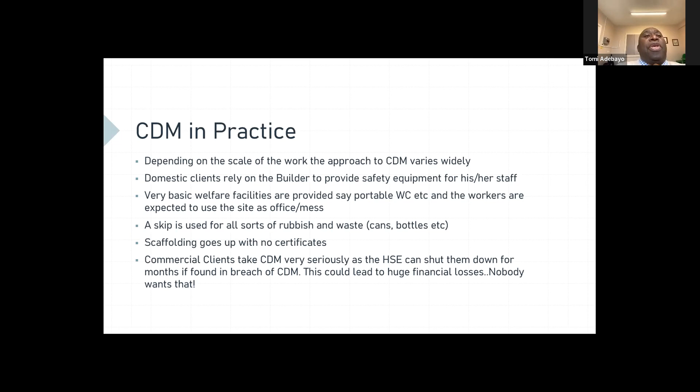Let's move to the next slide.

Now, in a typical domestic residential project, the ones that are very common are loft conversions, side extensions, basements, garage conversions. A loft conversion is very common because a 3-bedroom house can easily be converted to a 5-bedroom house with probably a fraction of the cost of the price of the house. So you could have a 3-bedroom suddenly become 5-bedroom by just spending between 35 and 50,000 on the house, depending on how big it is. Now, what we have as professionals, the challenges we face when working in this environment...

is that you're dealing with somebody that is a layperson, not to say that they are not educated, but they do not know much about construction, apart from things they've been reading on Grand Designs, Pinterest. They've seen all sorts of fancy things, and these things they want to implement in their house. And sometimes because they are paying, they believe you should listen to them and do what they want. So it does take a bit of confidence, maturity, and experience in order to let people control what they want to do.

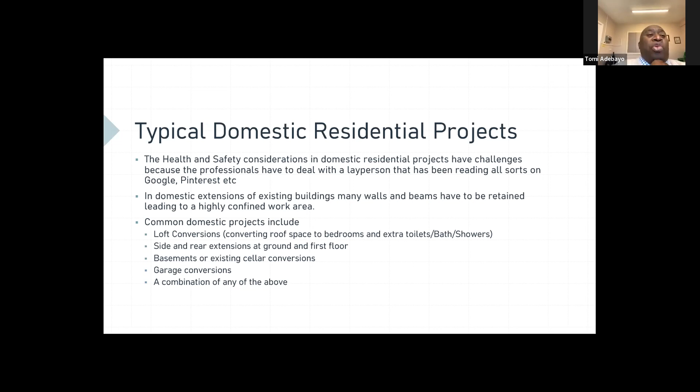So it does. Now, domestic client professionals. Because the domestic client is also a layperson, they do not always know who is qualified and who is not. A layperson will not necessarily know that an architect could be a chartered architect, or that a surveyor might not be an architect at all. They don't know that an engineer might be a chartered structural engineer - maybe he's actually a mechanical engineer. A lot of the time, they do not know these things.

So sometimes, inadvertently, they do employ people that are not very qualified. Another problem they do have is with the fees, in that they are trying to minimize their costs, and they end up employing people that are not very qualified.

Now, we have all sorts of demands by clients. In the UK, they really love these, what we call bifolding doors. They are doors that can open completely at the back of the house. Typically, they shouldn't be more than 4 meters wide for a reasonable person, but you'll have some people that say they want it, they will extend the house to the side and want to open it all completely. And the longest one, the widest one I've had has gone up to 13 meters.

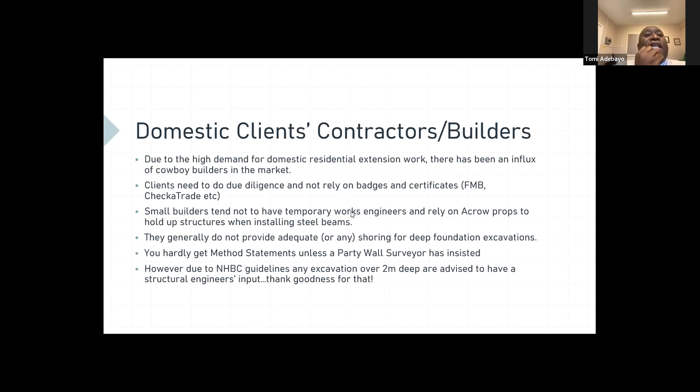On the commercial side, you find that these things don't happen. The typical commercial clients you would have are developers building blocks of flats, housing associations, and there is a huge demand for university accommodation. So there are lots of companies now coming into the market that deal solely with university accommodation, and some that deal solely with old people's homes and things like that.

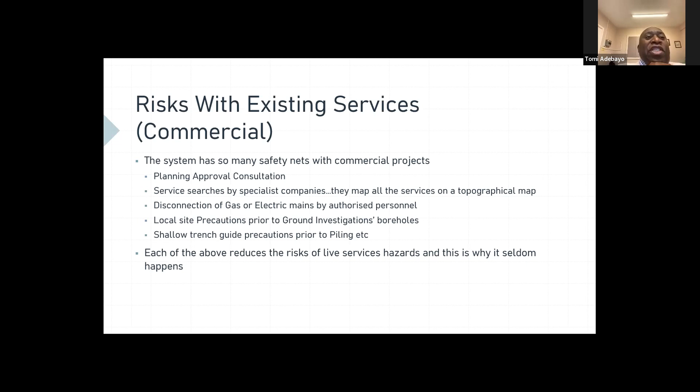Asbestos is something that leads to a very long-term fatal disease, asbestosis, and there are still properties that have asbestos in them. It's not very common in domestic, but there are some old garages that have asbestos roofing sheets, and sometimes unscrupulous builders will remove them and just dump them in the garden. They are supposed to be removed carefully. The builder can remove them, but he can't dispose of them, they have to be disposed of by a licensed handler.

All these things are very cheap to do properly, yet we still find people cutting corners doing this.

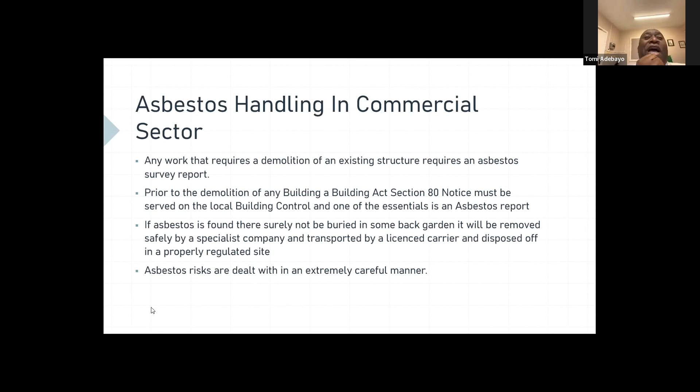In the commercial sector, you cannot demolish a house, property or building without an asbestos survey. You also need to notify building control at the local council under a Section 80 notice, and one of the prerequisites is an asbestos survey. They don't want to know whether you think asbestos is there or not - you have to carry out this survey. It has to be carried out by a regulated consultant, and that report has to be submitted to the council. If asbestos is identified, it will be removed by specialists, disposed of and handled by a licensed carrier, so you don't have problems like that.

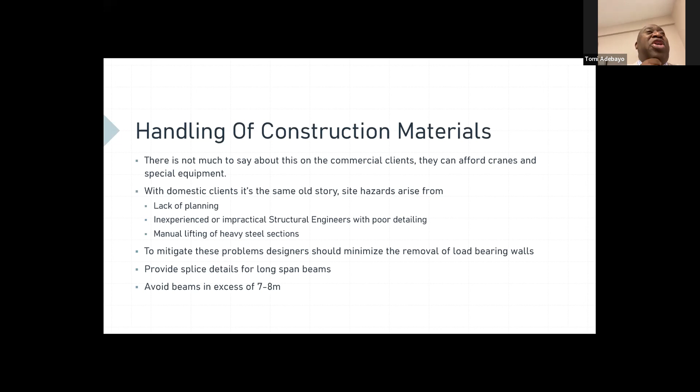Now, you do have very heavy steel sections, timber sections, concrete, and various building materials used to put a project together. These things require handling, and they have to be handled in such a way to reduce the risk to people carrying heavy equipment. Domestic clients sometimes have engineers that don't take into consideration all of the constraints in an existing house where walls are there that cannot be demolished. So sometimes we actually suggest to designers to reduce the removal of load-bearing walls, provide splice details for long beams, and avoid steel beams in excess of 7 to 8 meters - they are difficult to transport.

Now, just to look at a few scenarios where things have gone wrong - I wanted to do this before getting towards the end of my presentation, as I might have gone very quickly.

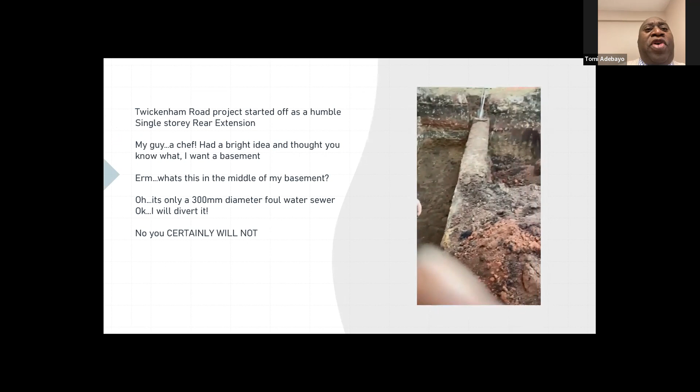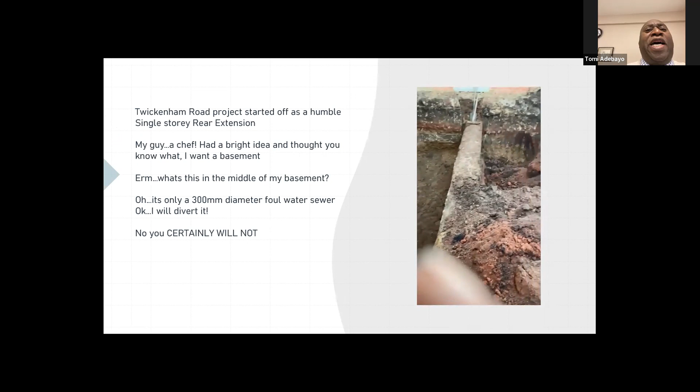So let's look at a project on Twickenham Road. Can you just play this video for us, please? Now, if you look at this guy, you can see that is supposed to be an extension. That thing running across his site is a main 300 millimeter diameter sewer. If you freeze it just there, you can see it running across the back of the property.

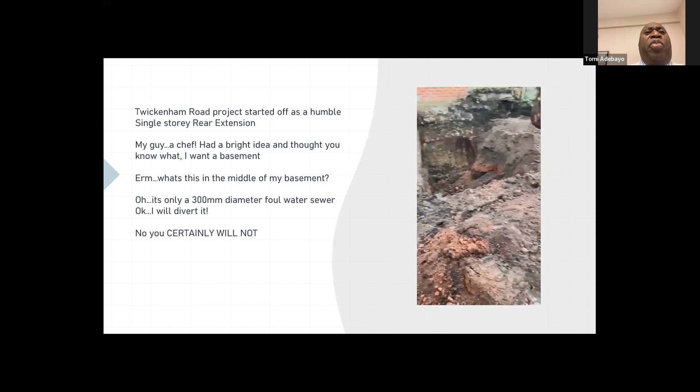This gentleman started this job and said, oh, I want to do a single-story extension at the back of my house - that's not a problem. Because he didn't do enough background checks, he started digging. Then suddenly he said, you know what, I want to do a basement. He changed his mind and said, oh, I want to do a basement. He started digging and said, what's this in the middle of my basement? Oh, it's a 300mm diameter sewer. All right, that's not a problem, I'll just divert it, he said.

So he called me up when he had this problem. He said, I'll just divert it. And I said, you are definitely not doing that - you can't divert a 300mm live sewer, and Thames Water, who own the sewer, only allow qualified, trained and certified builders to do such work. So these are the sort of things that happen on site in the domestic side when a client hasn't done enough homework. Let's move to the next.

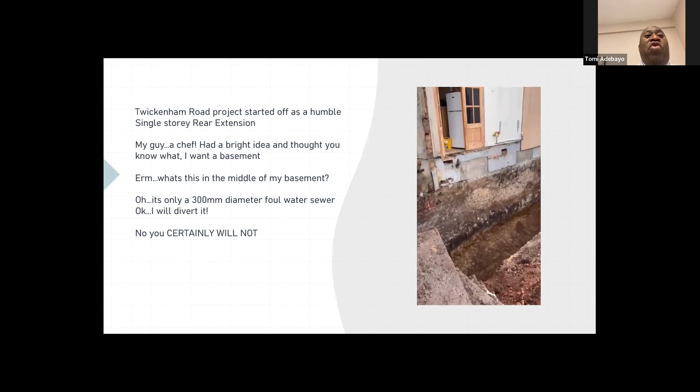This is another project. In this case, it's not necessarily the architect who happens to be a bit naive in that he was just following any demand the owner demanded. The owner said, look, I want a 10-meter wide bifolding door, I want an 11-meter open plan living room. Rather than telling this client that's dangerous, you don't really want to be doing that, we can hide a column here and there, they insisted to go ahead. I was drawn into the project - I couldn't, it was too late. The architect was feeling a bit embarrassed, he said he didn't want to lose face with the client. So I said, you know what, let me see - the beam will be very heavy, and I'll try my best to convince the client to change his mind.

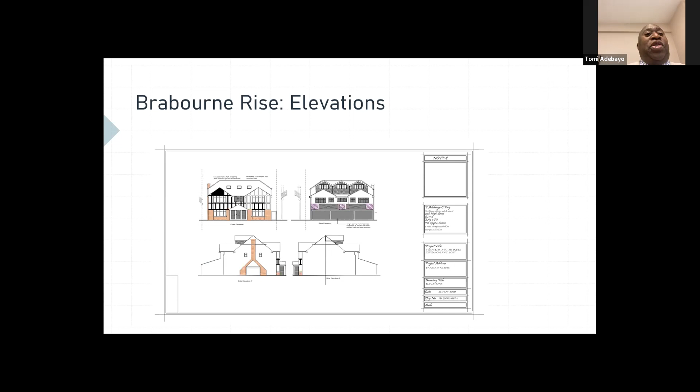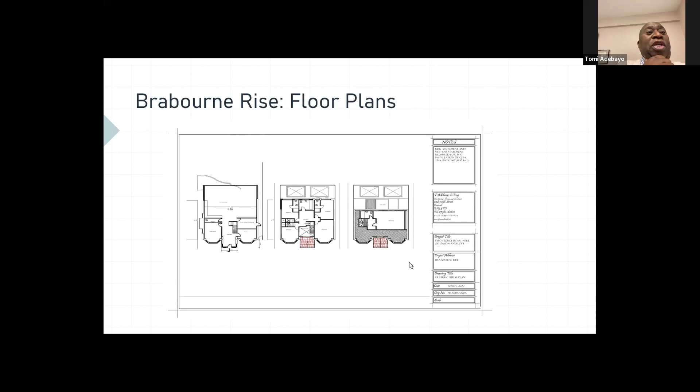Let's move on to the structural drawing, the next plan. When we did all our calculations, the steel beam turned out to be a 254x254 UC167 section over 11 meters. I'm sure there are some small cars that don't weigh that much. This is massive. The fabricator was shocked - he said he'd never installed such a beam before. He couldn't change this guy's mind. I said, well, I've done the calculations, the deflections are within the limits, but this is a bad idea.

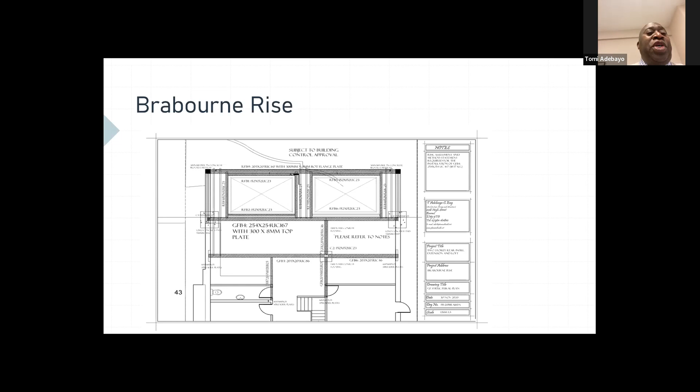Anyway, this gentleman went forward and installed it, but when he saw the deflection under live load, he started to think twice. So if you look at the next slide, common sense started to prevail, so we ended up having to put in 2 additional columns in order to bring the deflection within serviceability limits.

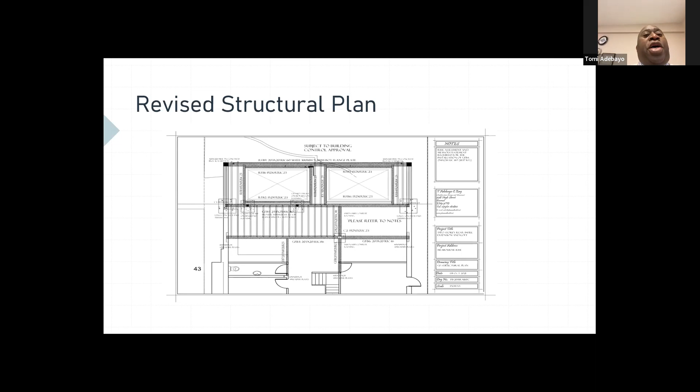Okay, let's move to the next project. This next project is in a place called Barton-le-Clay, in rural Bedfordshire. This client of mine is a very wealthy guy, as you will see in a minute. He bought this site, which used to be an old water reservoir, and is going to convert it into a residential dwelling.

Luckily, he remembered me and appointed us as his structural engineers. The architect had done quite a good job - in this case, the architect was very competent. I can't knock him. I think in this place, it's just a client who is used to getting his own way.

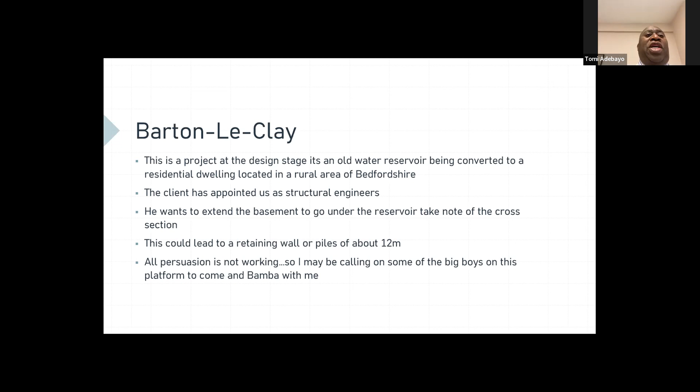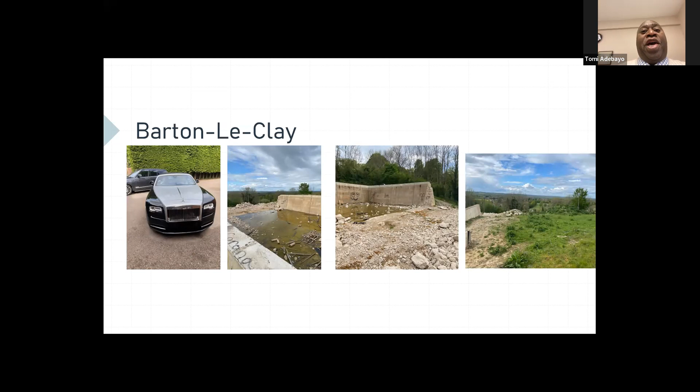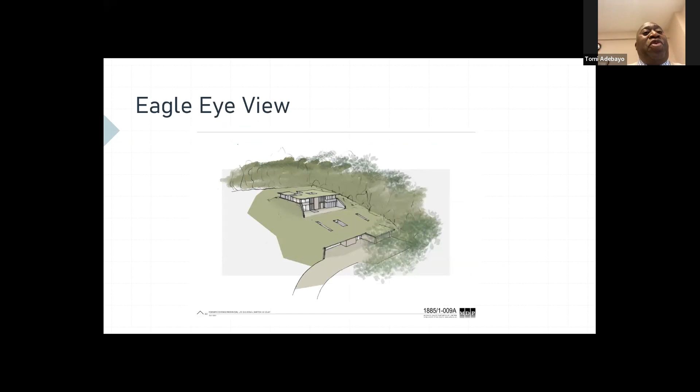And this is the view, the photo. And then you can now see what the end product is going to look like. This is something anybody would be proud of anywhere in the world. It's going to be beautiful when we finish it.

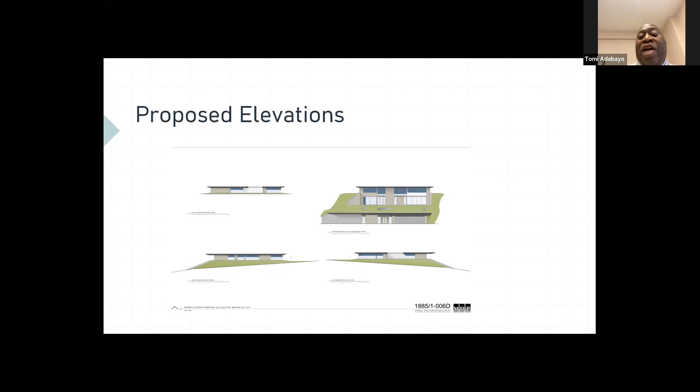Let's look at the next slide. You can see the elevations - very, very high quality when we finish it, grand design. You'll probably be one for Grand Designs, so you guys might see me on TV one of these days.

So my guy phoned me up a few days ago and he said, you know what, that's a waste of space, I want to go under that reservoir, I want to use that space under there. Why not? I said, you'll be looking at about 10 meters retaining wall. He said, so what, can it be done or not? I said, yes, it will cost you. Who asked you that? Can it be done? I said, okay, yes, it can be done.

So I think that's why I said on one of my previous slides, I'm going to have to call on some of my other fellow colleagues on this platform who are very versed in anchored sheet piles and stuff like that. Because no matter how experienced you are, there will always be some big boys bigger than you. You have to know when to reach out to people more versed in this sort of thing. Let's go to the next slide.

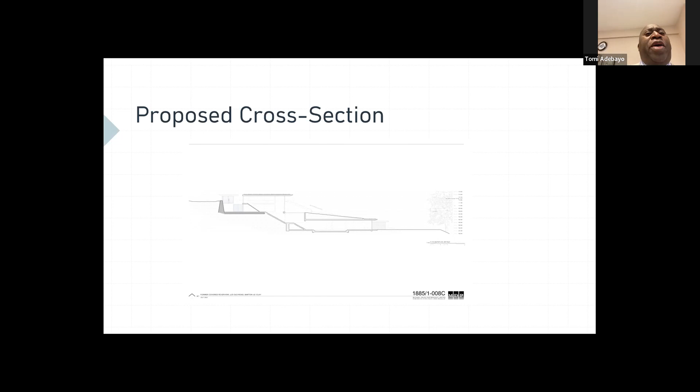So you can see the engineering challenges with this job. In this case, he has employed a seasoned architect. He's not short of money. The ground conditions are not too bad because it's chalk - chalk is very stiff and it does stand up, but still we will have to retain the earth. We can't rely on the natural stiffness of the chalk.

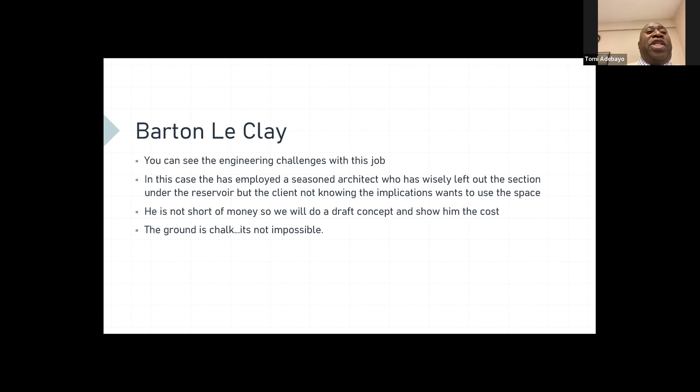So yes, definitely I'll be reaching out to some of you guys on this project.

Let's come to the conclusion: health and safety in construction applies in both small and large jobs. At the end of the day, the loss of one life, or somebody's spinal injury, fingers, limbs, it is equally important in both small and large jobs. Small jobs have their challenges because some people look down on them and say it's only a loft conversion. But if a steel beam drops on somebody's head, or a bolt drops from a height, or scaffolding comes down while installing a steel beam, it is still a life lost, which cannot be valued.

At the higher end of the market, your maturity comes into play when dealing with a very wealthy person insisting this is what he wants to do. In one case, I had to cave in because I didn't want my friend, the architect, to be too embarrassed, so I said okay, let's do this. In another case, the guy had so much money, so I thought, if he's got the money to do it, why not? But in another case where the guy wanted to divert a 300mm foul sewer, I just had to walk away because that is completely ridiculous.